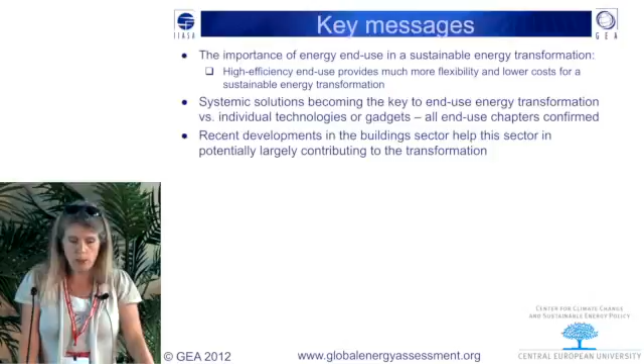Then I will tell you an interesting conclusion that we really didn't coordinate at all, and it comes through at least 5 chapters as a key message, that systemic solutions are becoming much more important than individual gadget efficiencies, and I will show it. It was also highlighted by the previous speaker. Then I will show how recent developments in the building sector help this sector in potentially largely contributing to the transformation.

Because it is possible now in all regions to build and retrofit very high performance buildings, mostly at costs that pay back. However, after the good news, the bad news is there is a significant lock-in risk, which we have for the first time quantified in the Global Energy Assessment. Also, there are very significant barriers, much more significant than probably in any other sector.

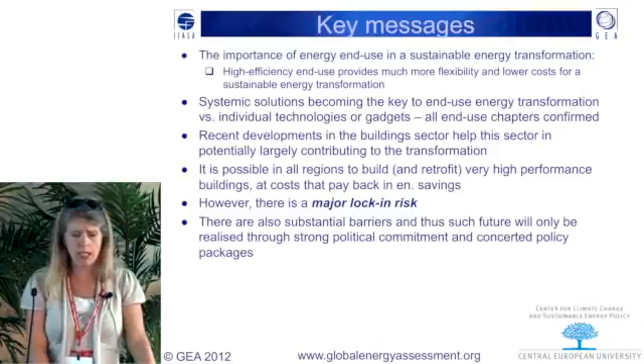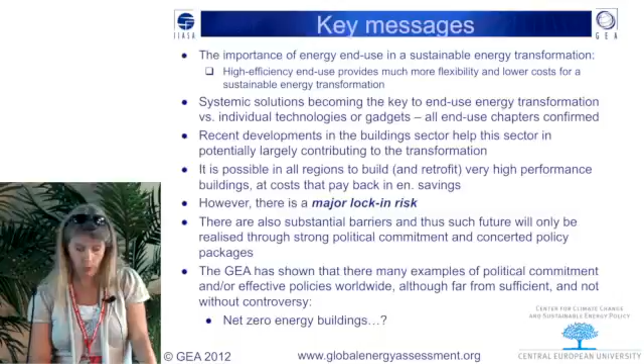So this future, a more sustainable buildings energy future, will only be realized with very strong political will and concerted policy packages. However, the good news is that there are already very good examples out there, although there is also something controversial. I will be very encouraged to bring also controversial points, and I will highlight those related to the net zero energy buildings. So with that, let me now show you 2 slides, which I'm flashing only because Naki will expand on them in more detail.

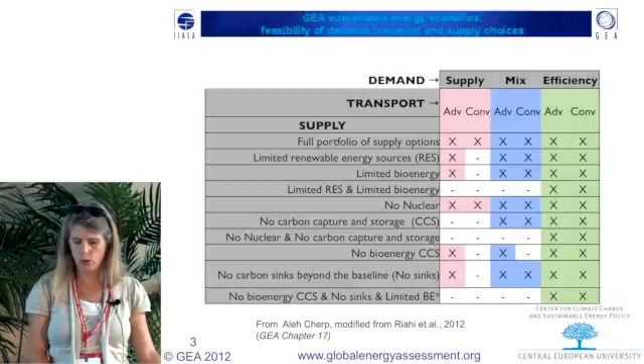This is from the scenario process of the Global Energy Assessment, which was the key integrating element in this work. And I'm not going to go into detail on this, but basically the important message is that if you have these 3 scenario groups, the supply, mix, and efficiency scenario group, if you push the efficiency lever hard, so if we look at the efficiency-dominated scenarios, those give you the highest level of flexibility on the supply side.

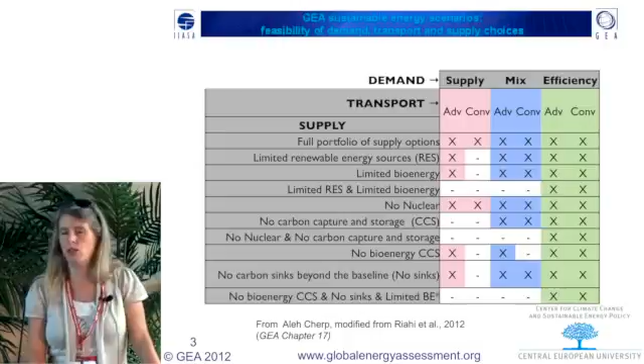So you will be able to afford much more choices on how you want your energy supply to look like. So that's one of the advantages. Another advantage is certainly the costs of such scenarios are typically lower than the other scenario families. So this is how energy future roughly will look like in the Global Energy Assessment, divided by the key sectors, how we slice them up. This is in the supply scenarios, and this one is in the efficiency scenarios.

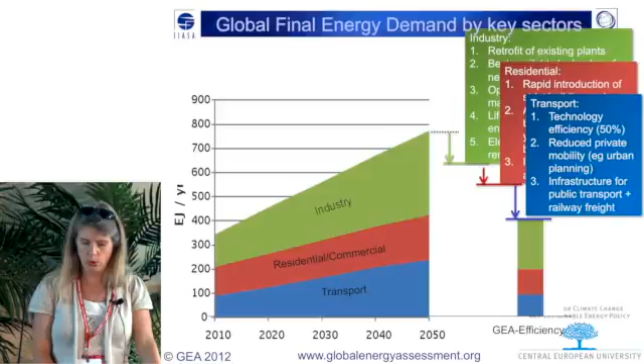But in all these scenario groups, you see that it is possible to contain residential and commercial the most. In fact, it's even possible to reduce total residential commercial energy use, so building energy use, as compared to the other 2 sectors. Although here transport is also getting reduced, but industry is more difficult to contain.

So what I mentioned was that there was a very interesting, at least to me it was quite interesting, that I had the mandate to look at consistency among the different chapters, so I was reading through these chapters in great detail, that all of the end-use chapters and several other chapters had one key message which was very common, and that was that, well, I wouldn't say that we reached the limit of pushing efficiency of individual gadgets, but we have become very good at that. And the real advances we have to expect now on moving towards systemic efficiency and holistic approaches.

Most concretely, for example, the industry chapter says the large gains will not come from narrow process efficiency improvement, but from application of broader system optimization strategies. They also state that the only way to cut energy consumption in industry more than marginally is to use much less of the products of industry and to sharply increase the rate of product reuse, renovation, remanufacturing and recycling.

Which means that this is not only system integration in one sector, but we really have to look at system integration across the whole economy. And this is such a challenging task, I believe. Even for the scenario work, that was quite hard to capture.

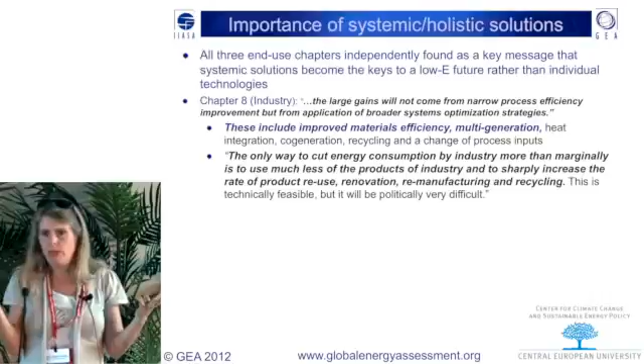And if we think about it, there are really fairly few policies and policy frameworks that are really able to cut across so many parts of the economy. In the building sector, I will definitely show that by individual product efficiencies, we can't really go beyond. Even 20–30% improvement is quite an optimistic one, whereas if you go to looking at buildings as complete systems, it's fairly easy to achieve as high as 90% reductions.

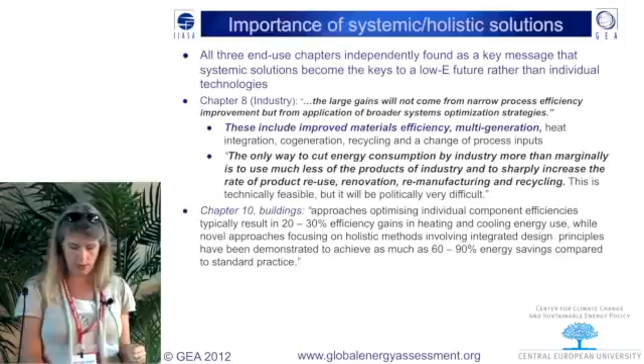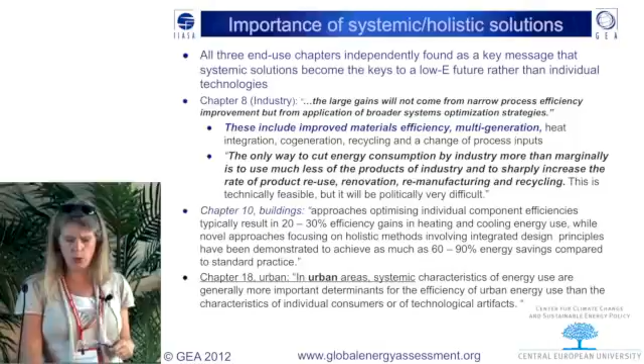The urban chapter also, the transport chapter also had similar conclusions. In the urban chapter, it says, in urban areas, systemic characteristics of energy use are generally more important determinants for the efficiency of urban energy use than the characteristics of individual consumers or of technological artifacts. So basically, just like Bob also mentioned, systems, I believe that's the overarching key message from GEA. And there is much more to be done on that level.

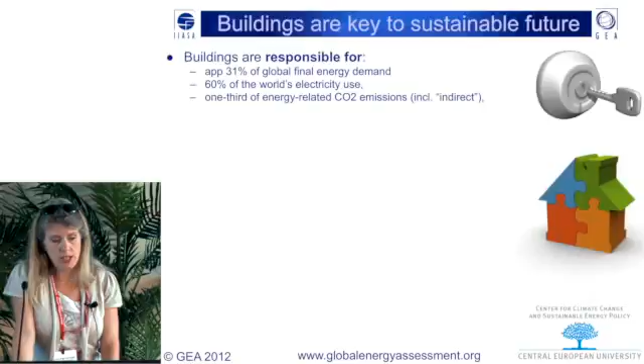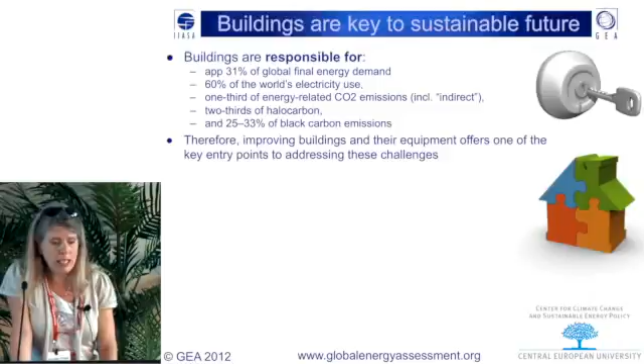So with that, let's turn to the buildings sector more specifically. Buildings are key to sustainable systems and sustainable energy transformation because almost 1/3 of global final energy demand currently is consumed in buildings. 60% of the world's electricity is used in buildings. 1/3 of energy-related CO2 emissions, 2/3 of halocarbon emissions, and about 1/3 of black carbon emissions. So improving buildings and their equipment often offers one of the key entry points to addressing these challenges.

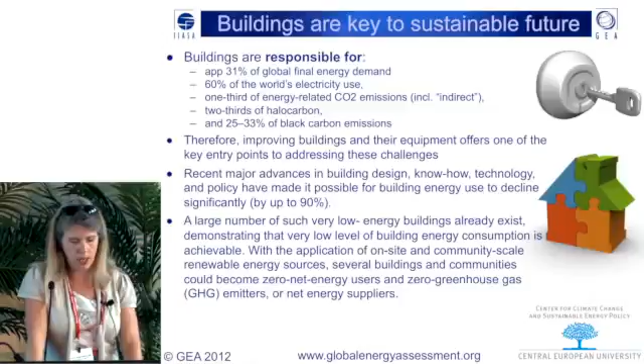The good news is that fairly recent advances in what we know about buildings and holistic solutions have been quite remarkable. And now there are lots of very high efficiency buildings that exist almost throughout the world, although unfortunately more prevalent in the developed parts of the world. And combined with the very high efficiency of buildings, you also see that we start to move into on-site and community-scale renewable energy sources. So with the combination of the two, buildings could potentially become zero net energy or even net suppliers. And I will discuss this point a bit more later.

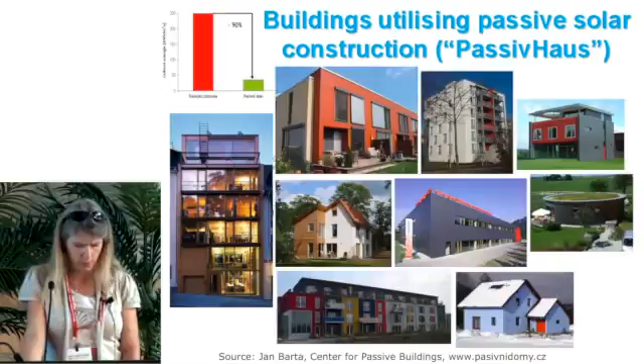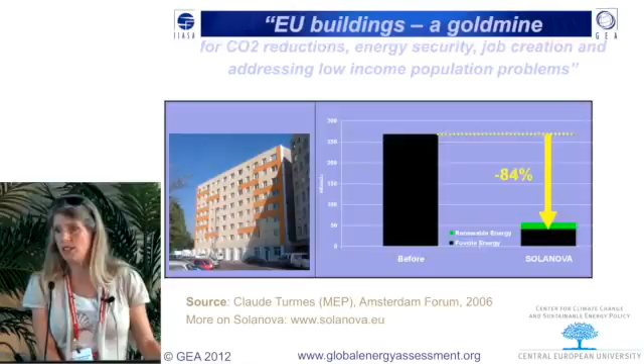But there are even the mass products. This is a building in Hungary, in Dunaújváros, one of the industrial areas. As you see, this building is identical to this one. It was retrofitted, and after retrofit, it has been saving 84% of total heating and cooling and hot water energy. This was done without any rocket science, fairly simple approaches, just applying the systemic solutions. And the great thing about it is that residents just love living there, and their quality of life has very significantly increased. And there are a lot of these buildings all throughout former Eastern Europe and the former Soviet Union, hundreds of thousands.

So that was just a highlight about the elements of the solutions. But what's also important to emphasize is that beyond technologies, what we are usually much worse at understanding is the role of lifestyles, culture, behavior. And sometimes it's a touchy issue, but the GEA, the Global Energy Assessment, has not shied away from really making advances in this, and Jayashri will speak this afternoon more concretely.

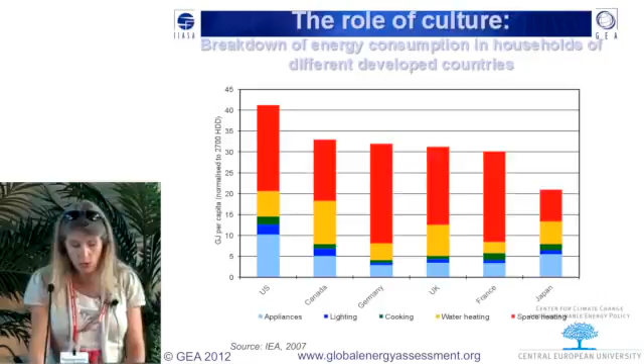We know that the Japanese, despite being one of the richest and most affluent in the world, are very prudent about heating energy consumption. They really use a service approach. If you have visited Japanese homes, they have the kotatsu system where they really heat only the feet so that you feel comfortable, but they don't heat the whole room. And so they're very sophisticated cultural solutions, and they use them even in these times when they could clearly afford much more heating energy use.

So these were highlights from the elements of the solutions. You can look for the details in the chapter. But let's see, if we put all of this together, how far can the building sector help us in the global energy transformation? So we have worked together with IIASA on the scenarios, and we've done the building scenarios in harmony with the global scenarios.

I have 6 minutes still here.

We have found that almost a half of global total final heating and cooling energy use reduction is possible by the middle of the century as compared to 2005. And this is attainable despite the enormous increase in building floor space that is expected, despite the enormous increase in service levels, and despite the artificial constraints that we provide energy access and sufficient thermal comfort to everyone.

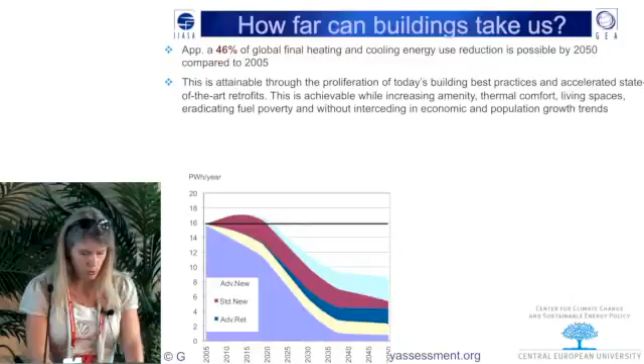So this is the building scenarios. Its energy use, as you see, is going down. This is the efficiency scenario. And this is, at the same time, while floor area is increasing by 126% in the same period. So that's quite a reduction in energy use.

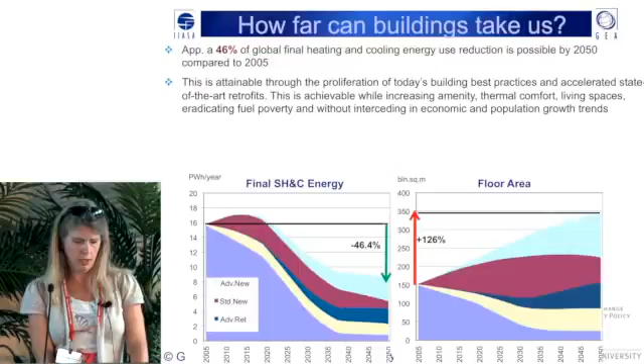And the investment costs are definitely substantial. We shouldn't shy away from the statement that we will need over 14 trillion US dollars in undiscounted investments. At the same time, consumers, end users, are going to save almost $60 trillion, also in undiscounted energy cost savings. It's also true that in places where we expect a significant service improvement, there is much less of a decrease, much less of savings, but at least you still will cut roughly even between investments and savings, such as in Africa and in India. So this was the nice news part.

However, there is a very significant lock-in risk, which we quantify for the first time. The blue is basically the scenario that I've just shown you, that it's possible to reduce, just with the proliferation of today's best practices, by half the energy use of 2005. But at the same time, we've also drawn a scenario in which we just modeled what if we implement all the good and ambitious policies to the most ambitious levels that different governments are presently planning.

And the sad news is that even if we do everything we said in 2010, then we will still increase global building energy use by about a third. So that represents about 80% of 2005 energy use lock-in risk. So we are locking in that much energy use, which we are not going to be able to come back at in the next few decades, because once you build a building or once you have a major retrofit, it's either extremely uneconomic to implement new energy efficiency measures for a few decades.

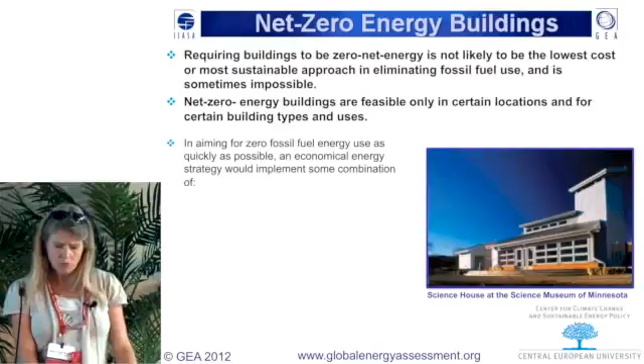So if you want zero fossil energy buildings, we recommended an approach that first you bring your building energy use down as low as possible, and then look at all available waste heat and waste energy sources. And after you utilize those, only then you start thinking about whether it makes more sense to produce the remaining energy on-site, or maybe it may be more environmentally efficient or cost-efficient to buy the remaining energy from sustainable sources from outside.

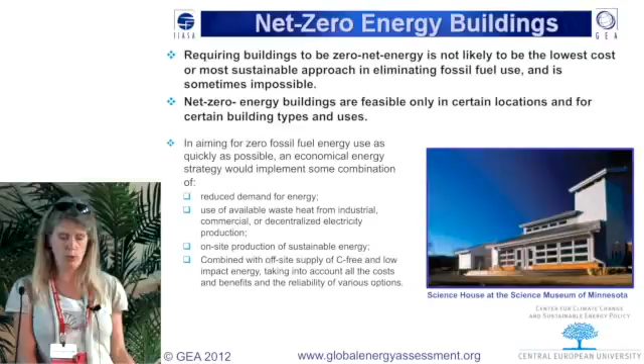So basically, we did not conclude that. We just want to warn the world that zero net energy buildings are very politically sexy and attractive, but they are not necessarily the best solution. Rather, go for very low energy buildings and combine them with the best possible energy sources, what's best locally.

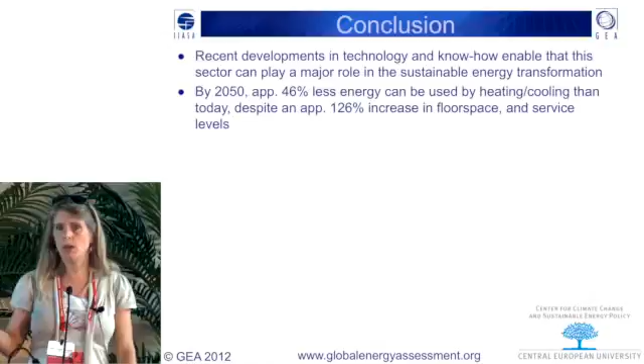So, in concluding, first, I've shown that recent developments, mainly systemic know-how and systemic understanding about holistic solutions, integrating industry to the users and so on, enable the building sector to play a very significant role in bringing global energy use down. For example, I've shown that by the middle of the century, it is possible to almost halve building energy use as compared to 2005, despite an almost 130% increase in floor space, while providing everyone sufficient access and full thermal comfort levels.

However, I have shown that there is also a very significant lock-in risk, and personally I find this the most alarming because politicians don't understand. The EU policy got very alarmed when they read these reports, because we are running into a situation where we are locking in at least 80% of today's building energy use by the middle of the century.

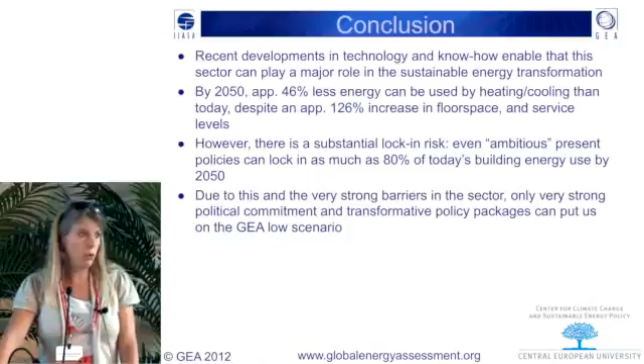So due to this and the very strong barriers that prevail in this sector, we need very strong political commitment, which is more than just rhetoric, and transformative policy packages which go beyond incremental change and which are not going to be easy. And only those can put us on the efficiency scenario that Naki will show.

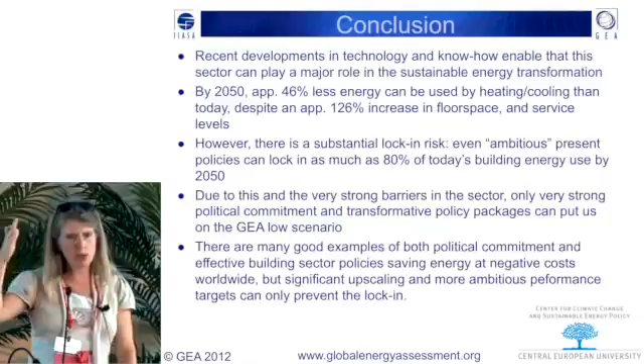The good news is that I have shown that both technology-wise and policy-wise, there are many good examples and best practices worldwide, and there are already many policies saving energy for the end users at negative or very low costs. But this is very far from enough. We need significant upscaling, and in the existing policies, which are supposed to be ambitious, we need much more ambitious performance levels closer to the state of the art in order to prevent the lock-in.

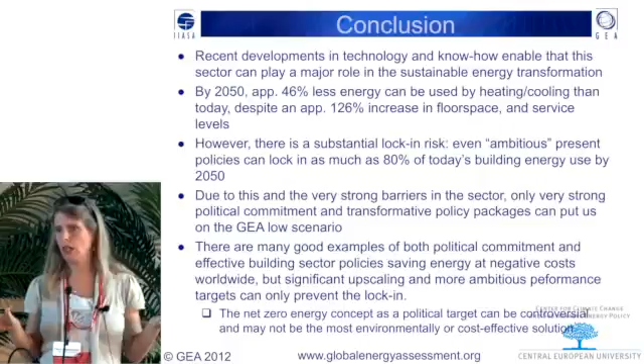And finally, I made a point that before we jump into praising net zero energy policies, we should think carefully whether they are really the best solution in the particular situation.